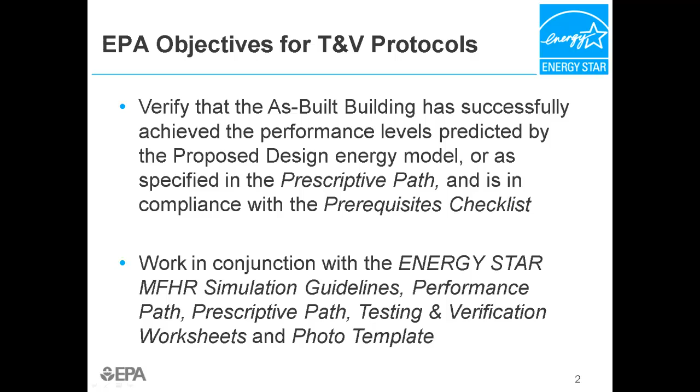One of the principal objectives in the multifamily high-rise program is that all buildings earning the ENERGY STAR meet some minimum prerequisites. A prerequisites checklist is provided to easily summarize and document these requirements. All building components must comply with the specifications contained within the prerequisites checklist. During an inspection, if a building component is determined to be in non-compliance with the checklist, corrective action must be taken to bring the building into compliance. Otherwise, the building will not be able to earn the ENERGY STAR. If following the prescriptive path, the prescriptive checklist includes all prerequisites and is used to document program compliance.

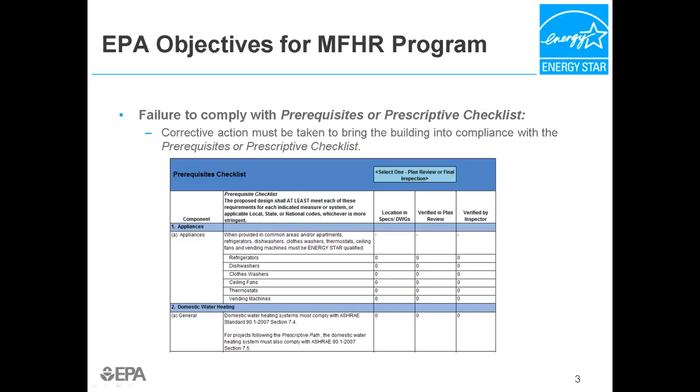Another objective of the program is to ensure that not only the design of the building meets ENERGY STAR requirements, but that the constructed building also meets those requirements. In the performance path, if an individual building component is found to be performing at a less energy efficient level than that which was included in the proposed design model, one of the following actions shall be taken. Otherwise, the building will be ineligible to earn the ENERGY STAR.

Option 1: Take corrective action to remedy the problem and bring the building component to the efficiency levels assumed in the proposed design model. Option 2: Allow the component to remain in its current condition, but the as-built energy model must be adjusted to accurately represent the condition. In any case, the as-built energy model must still demonstrate at least a 15% improvement over the baseline building.

In the prescriptive path, if an individual building component is found to be performing at a less energy efficient level than that which was required in the path, one of the following actions shall be taken. Option 1: Take corrective action to remedy the problem and bring the building component to the efficiency levels required by the prescriptive path. Option 2: Allow the component to remain in its current condition, but the building can no longer follow the prescriptive path. An as-built energy model must be created to accurately represent the completed building, and the as-built energy model must demonstrate at least a 15% improvement over the baseline building. If neither option is pursued, the building will not be able to earn the ENERGY STAR.

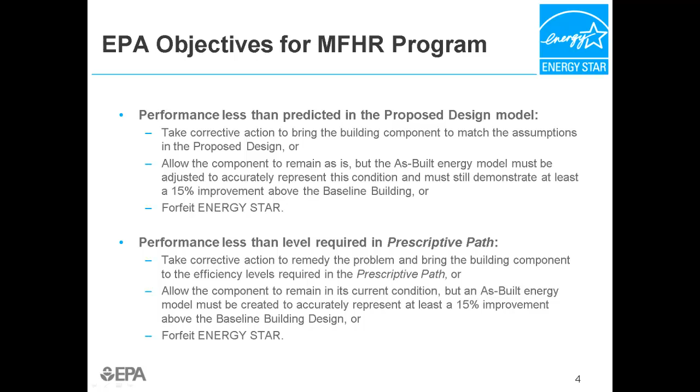Before we review the actual T&V protocols, we'd first like to describe the overall process that should be followed in order to successfully comply with them.

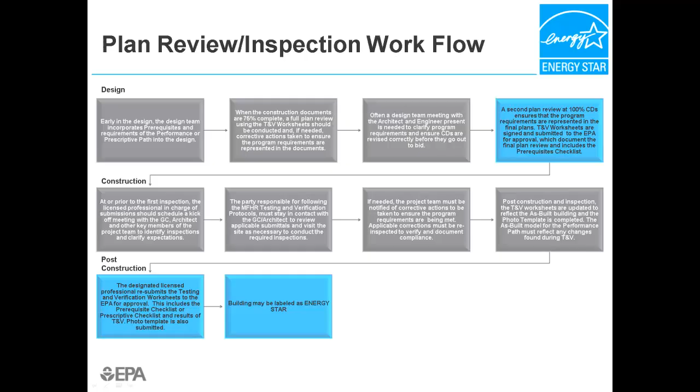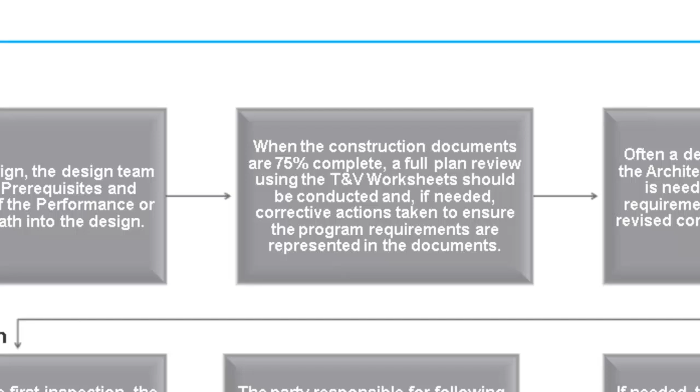Early on, the design team incorporates prerequisites and requirements of the performance or prescriptive path into the design. When the construction documents are 75% complete, a full plan review using the T&V worksheets should be conducted and, if needed, corrective action taken to ensure the program requirements are represented in the documents. Often, a design team meeting with the architect and engineer present is needed to clarify program requirements and ensure CDs are revised correctly before they go out to bid.

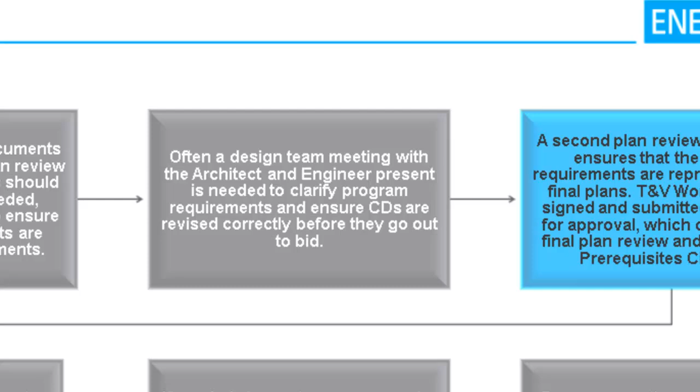A second plan review at 100% CDs ensures that the program requirements are represented in the final plans. This plan review is documented using the T&V Worksheets and must be signed by a registered architect or professional engineer and submitted to the EPA for approval.

Following the design stage but prior to construction, the licensed professional in charge of submissions should schedule a meeting with the general contractor, architect, and other key members of the project team to identify inspections and clarify expectations.

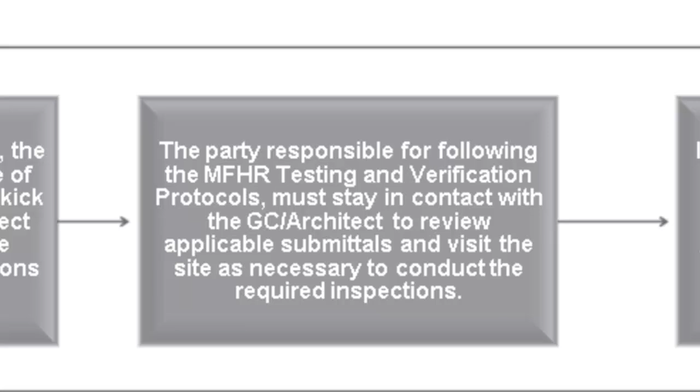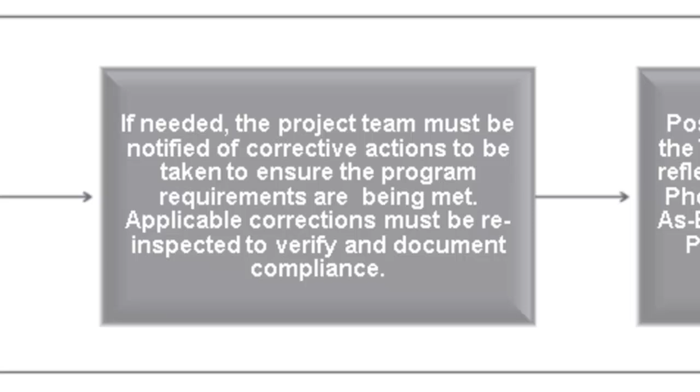The party responsible for conducting the testing and verification must stay in contact with the GC and architect to review applicable submittals and visit the site as necessary to conduct the required inspections. If needed, the project team must be notified of corrective actions to be taken to ensure that program requirements are met. Applicable corrections must be re-inspected to verify and document compliance.

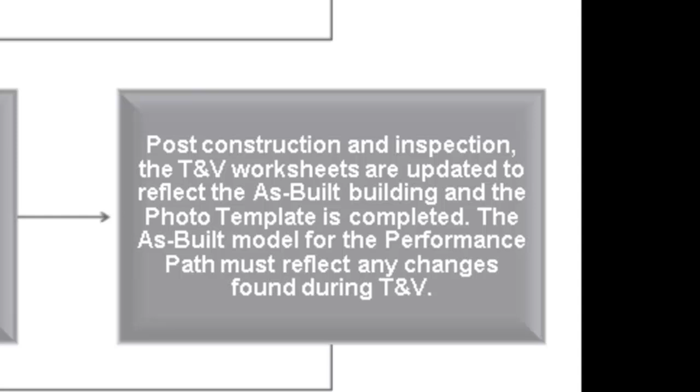Post-construction and inspection, the T&V worksheets should be updated to reflect the as-built building and complete the photo template. The as-built model for the performance path must reflect any changes found during T&V. The designated licensed professional should sign and resubmit the final testing and verification worksheets to the EPA for approval.

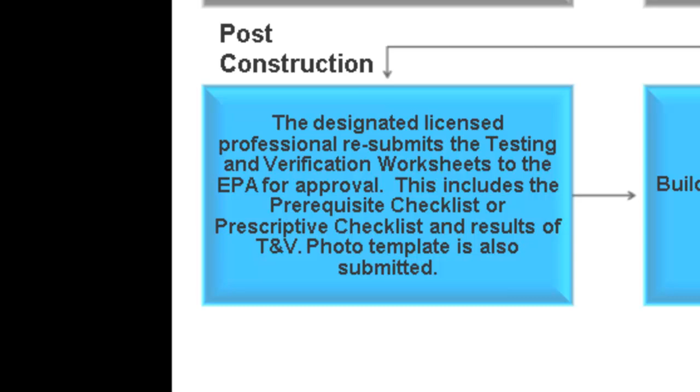This includes the prerequisites checklist or prescriptive checklist and results of testing and verification. The photo template is also submitted at this time. If approved by the EPA, the building may be labeled as ENERGY STAR.

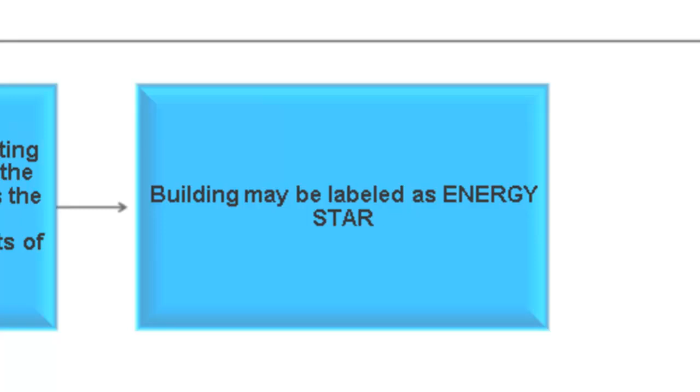Now let's review the protocols themselves.

The T&V protocols cover all building components, starting with appliances, central and in-unit domestic hot water systems, above-grade and below-grade walls, roofs, floors, windows, exterior doors, and vestibules.

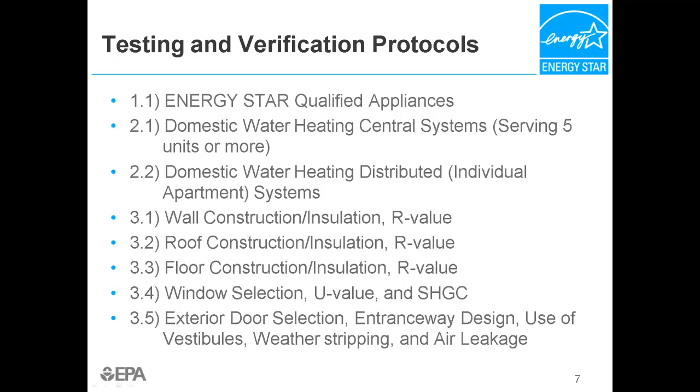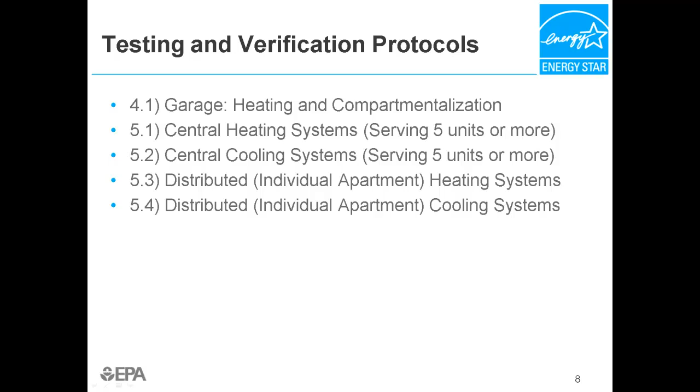Also included are garage heating and compartmentalization, central heating and cooling systems, and in-unit heating and cooling systems, as well as interior and exterior lighting and controls, emergency lighting, motors, envelope air sealing and total air leakage, common area and in-unit ventilation systems, and metering configuration.

We won't be reviewing these in detail in Part 1. Rather, we'll take a look at the basic structure of the protocols and how they will streamline the inspection process and help ensure that the project successfully achieves all program requirements.

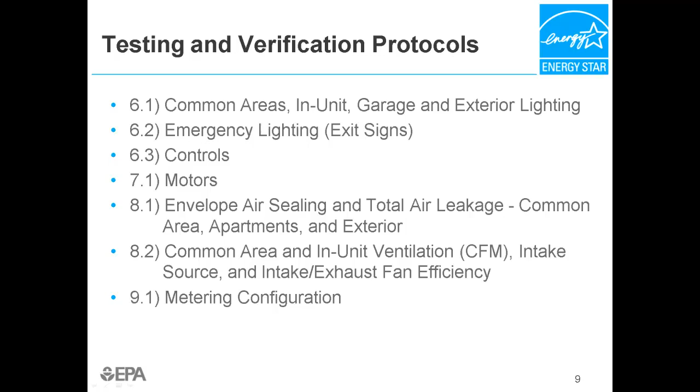Details on each protocol are provided in Parts 2 and 3 of this webinar series.

For each building component addressed in this document, a set of protocols has been defined using a standardized system and nomenclature. The standard elements of the protocol for each component are as follows.

The first element is the type of testing protocol. The type of inspection or test required is listed in this section based on a standardized set of options as follows. Visual inspection: if this is checked, it indicates that the conditions can be inspected via direct visual inspection of the existing condition and documented with detailed photographs.

If taking photographs, photos of faceplates, fixture type, insulation type and depth, etc., must be clear enough to read what is being checked. For example, reviewers should be able to read model numbers from the faceplate, GPM ratings from faucets, and the ruler showing insulation depth.

Also, the file name of each photo should clearly identify the building component and its location in the building. A Microsoft Word-based photo template is available to facilitate photo documentation for those protocols that require it. It must be submitted to the EPA at the end of the project.

However, once a licensed professional has submitted 3 photo templates to the EPA for buildings that have earned the ENERGY STAR, submission of the photo template is no longer required for that individual.

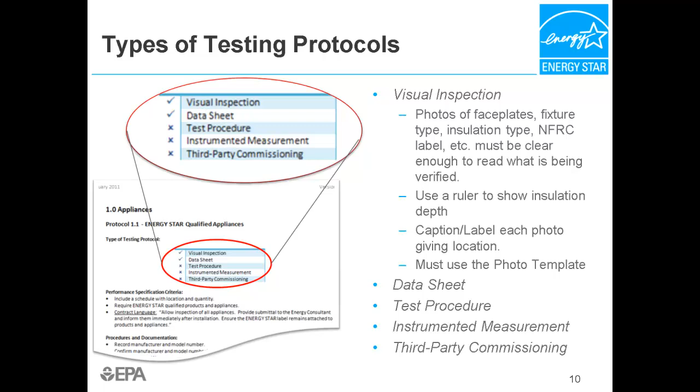The second element of the protocol is the performance specification criteria. This section lists the actions to be taken during the design, bidding, and construction phases of the project to ensure that the performance requirements of the building components are included in bid and contract documents so that subcontractors are properly informed of their responsibilities and expectations.

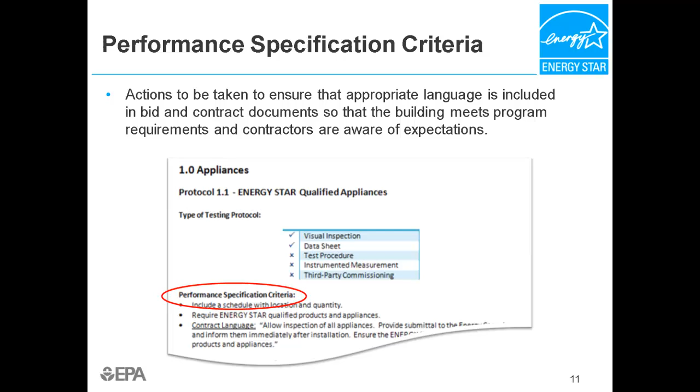All requirements listed in the performance path or prescriptive path must be incorporated into the construction documents. You should clearly identify who is responsible for proper installation and construction. In addition, contract language is suggested in this section that can be included in the construction documents to ensure that the GC is aware of his or her responsibilities in facilitating the inspection process.

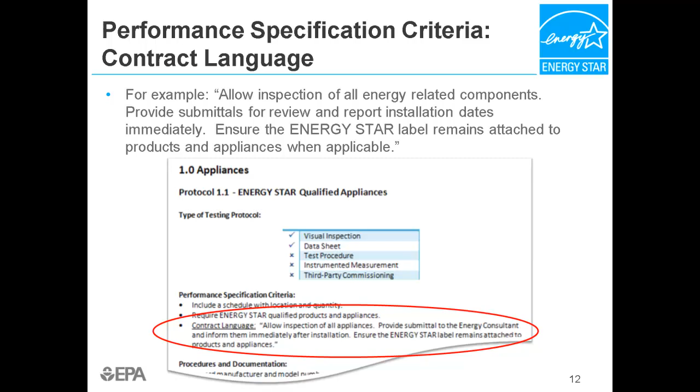The third element of each protocol is the procedures and documentation section. This section lists the steps to be followed to ensure that each building element is inspected at the appropriate time, and that the necessary data is collected and documented in the T&V worksheets and, if applicable, for use in the as-built energy model, or to prove that the requirements of the prescriptive path have been met.

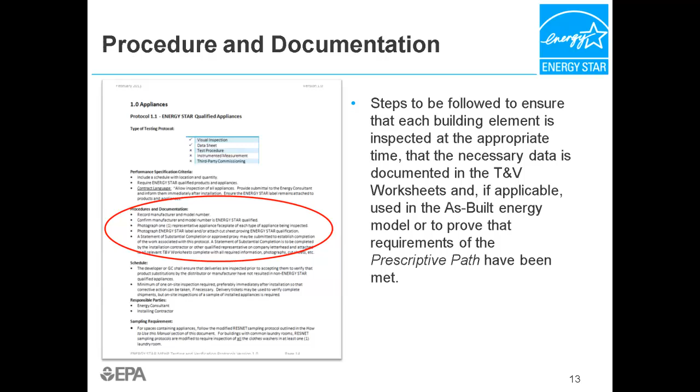The fourth common element of the protocols is the schedule section. Although exact timing of inspections may vary significantly from one building to another, this section identifies the point in construction when a particular inspection or test should take place. The party responsible for the testing and verification protocols must communicate frequently with the developer or GC to understand the construction schedule and be available for inspections when necessary without slowing down the construction process.

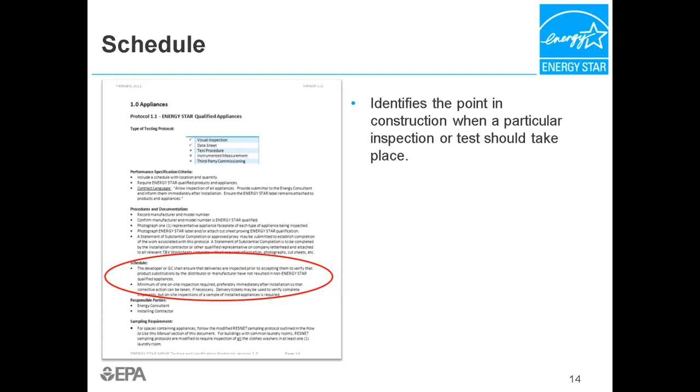The fifth element lists the responsible parties. This section identifies the potential parties responsible for a specific inspection or test and which other parties need to be available or coordinated with to effectively carry out the inspection.

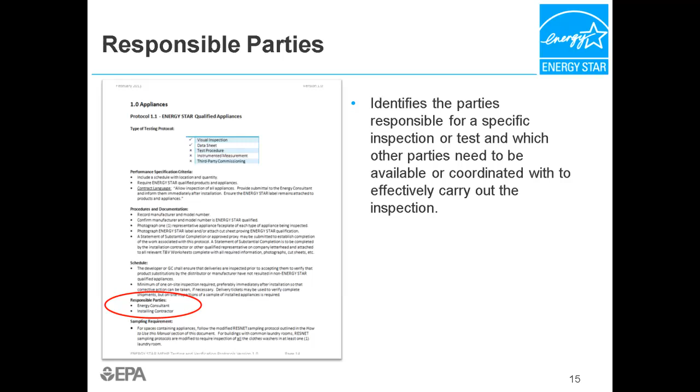The final element in each T&V protocol is a section on sampling requirements. For building components that are duplicated many times throughout the building, such as windows and light fixtures, or cover large areas or sections of the building, such as wall insulation, the sampling requirements section in each specific protocol identifies the minimum required area or sample to be inspected.

If the minimum sample is inspected with a 100% compliance rate, then the inspection process is complete. If a failure is detected within the sample set, corrective actions must be implemented and the sample retested in order to be compliant. In general, the testing and verification protocols that follow sampling follow RESNET sampling protocols, as opposed to requiring inspection of 100% of the installed components.

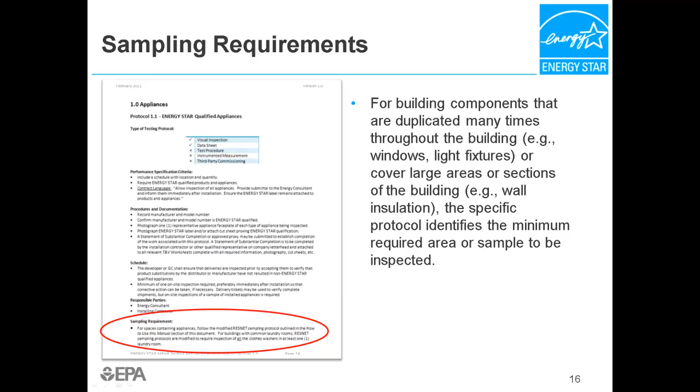For a full description of RESNET sampling protocols, please refer to RESNET's 2006 Mortgage Industry National Home Energy Rating Systems Standards, Chapter 6. However, the intent is captured in the following sections.

Section 603.7.1. A complete set of sampling controls shall be performed at a minimum ratio of 1 test or inspection out of 7 spaces or apartments within a given sample set, per the sampling rate requirements below. The sampling controls can be completed collectively on a single space or apartment, or distributed across several spaces or apartments within a given sample set, provided that the total number of individual tests and inspections meets or exceeds the minimum ratio set forth in 603.7.1.

For example, in a set of 7 apartments, all inspections for insulation, windows, and air leakage can be conducted on the same apartment and lead to compliance for all 7 apartments in the sample set. Alternatively, one apartment could be inspected for insulation, another for windows, and another for air leakage, and could also lead to compliance for all 7 apartments within the set.

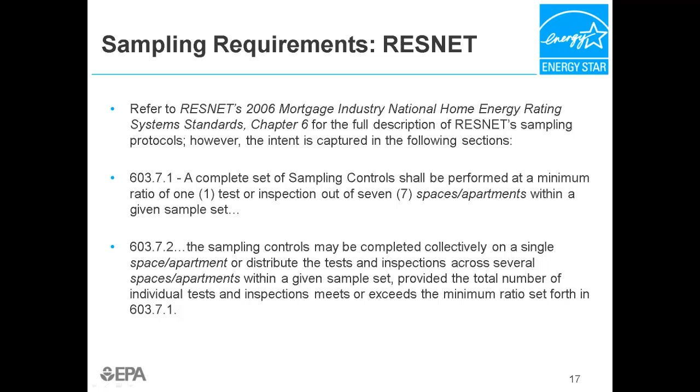603.7.3. To qualify for sampling in a metropolitan area, a builder shall first complete, without any incidents of failure, a complete set of sampling controls on at least 7 consecutive apartments in that metropolitan area.

For this initial phase of testing and inspection, the complete set of sampling controls shall be performed on each of the 7 apartments. For example, in a 100-unit building, each T&V protocol must be successfully met in 7 apartments before sampling can be used in the remaining 93. If a builder has completed the protocols in another building in the same metropolitan area, sampling can begin right away without the 7 consecutive apartments.

603.7.6. When an initial failure occurs, the failed item or items shall be tested or inspected in 2 additional spaces or apartments selected from the same sample set.

Testing and/or inspections for any items that may become inaccessible during the construction process, such as wall insulation, must be timed so additional testing and inspections can occur on other spaces and apartments in the sample set before they also become inaccessible for testing or inspection.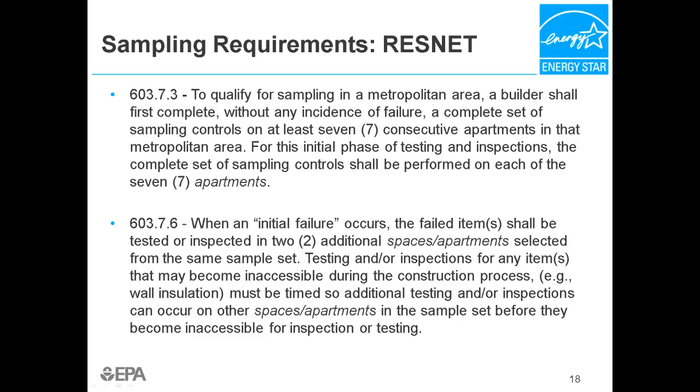603.7.7. When an additional failure occurs in one or more of the 2 additional spaces or apartments, the failed item or items shall be tested or inspected in the remaining 4 spaces or apartments selected for the same sample set.

603.7.8. Until the failure is corrected and identified in all failed spaces, none of the apartments or spaces shall be deemed to meet the threshold or labeling criteria.

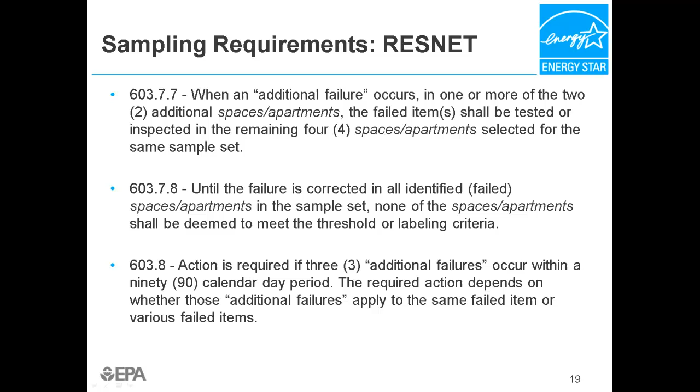603.8. Action is required if 3 additional failures occur within a 90 calendar day period. The required action depends on whether those additional failures apply to the same failed item or various failed items. Action could mean suspension of sampling and requiring testing and inspection of all units.

Let's review what's required for a statement of substantial completion. Not all of the testing and verification protocols need to be conducted by a third party. Some can be completed by the installation contractor themselves or another qualified representative.

When submitting the T&V worksheets, a signed statement of substantial completion, or approved proxy, may be attached to the relevant and fully completed worksheet. When submitting a signed statement of substantial completion, the project's licensed professional who is signing the EPA submittals is still responsible for performing the necessary due diligence to ensure that the statement of substantial completion is accurate and complete.

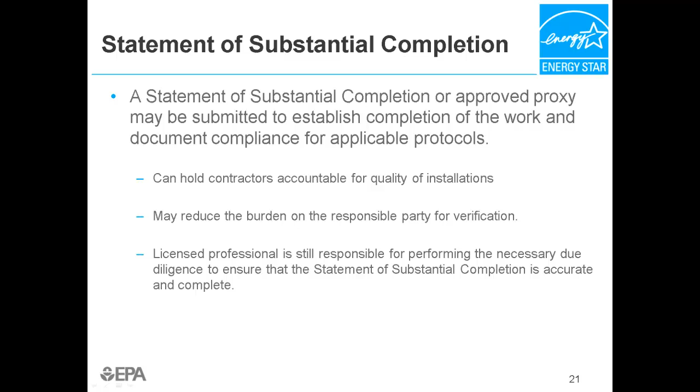The relevant T&V worksheet must still be completed with all required information, photographs, cut sheets, etc., to demonstrate compliance with the protocol. The actual statement of substantial completion should be on company letterhead and list the project name, address, contact information, and signature for the individual completing the statement, and state which protocols have been met through this approach.

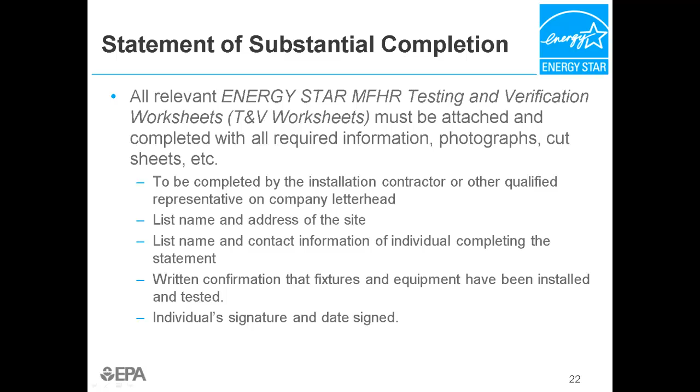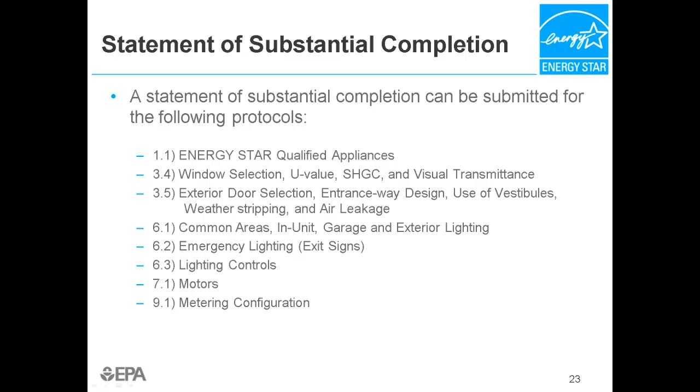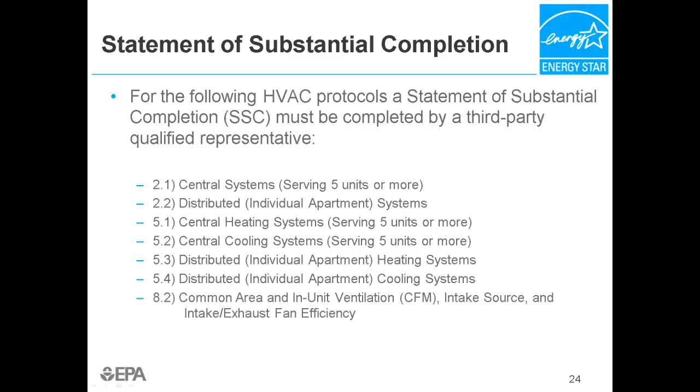Now that we have described the basic structure of each protocol, let's introduce you to the many standards referenced throughout the document.

The Air Conditioning Contractors Association, ACCA, publishes manuals J, S, and D. These manuals provide standardized procedures for completing sizing calculations for heating and cooling systems, manuals J and S, as well as duct system sizing and design, manual D.

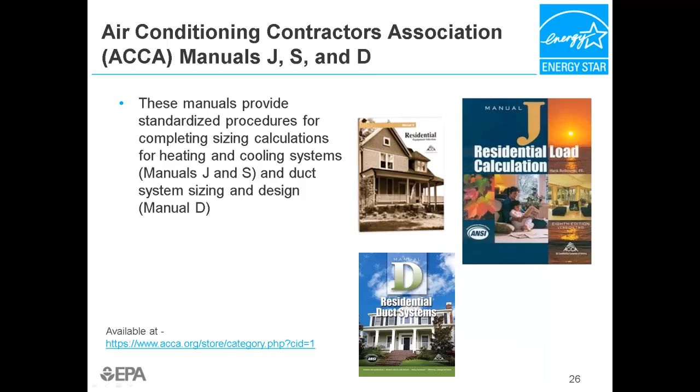The Air Conditioning, Heating, and Refrigeration Institute provides an online directory of certified ratings for heating and cooling equipment.

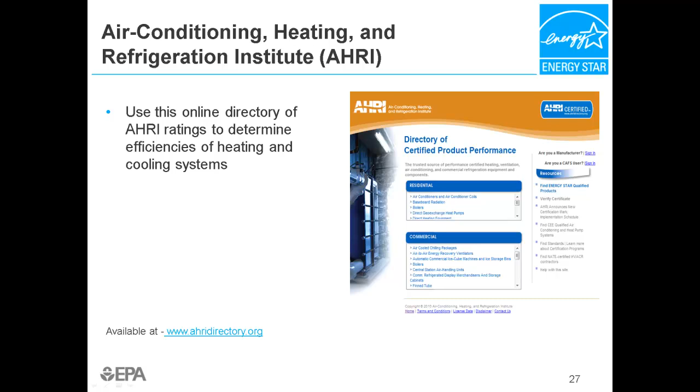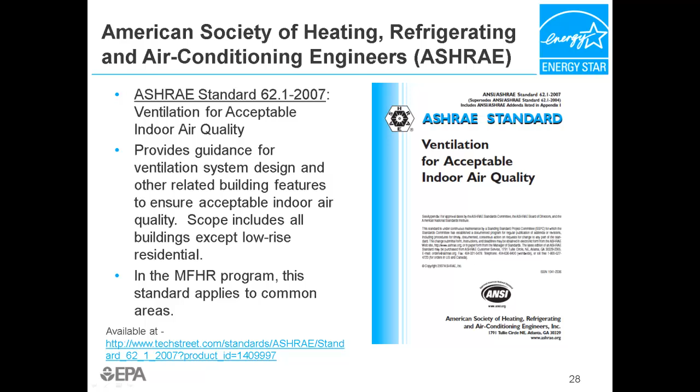The American Society of Heating, Refrigerating, and Air Conditioning Engineers, ASHRAE, developed a ventilation standard for acceptable indoor air quality that is referenced in the Multifamily High-Rise Program for Common Areas. ASHRAE also has a ventilation standard, 62.2/2007, that is referenced for the apartments of multifamily high-rise buildings.

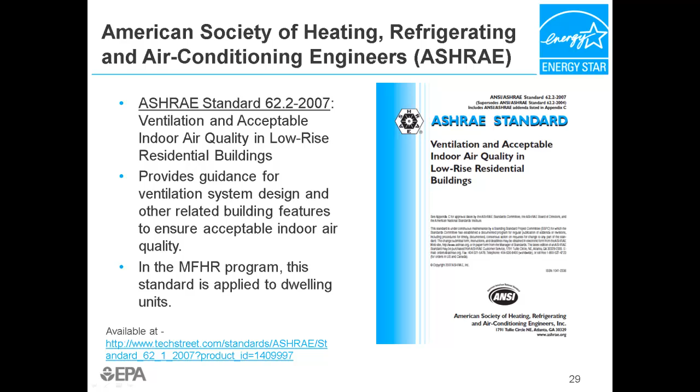ASHRAE Standard 90.1/2007 is an energy standard for buildings except low-rise residential buildings and describes the minimum requirements for the energy-efficient design of high-rise buildings. This standard is highly relevant to the performance path as it describes the efficiency of the building components of the baseline building.

ASHRAE Standard 189.1/2009 is the primary source document for the building envelope requirements and minimum equipment efficiencies for the prescriptive path.

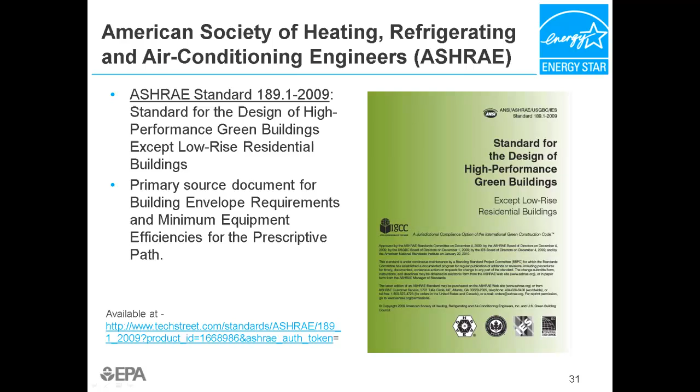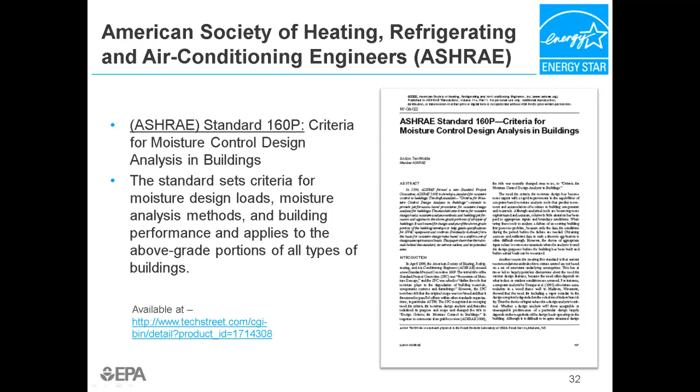ASHRAE Standard 160P is the standard that sets criteria for moisture design loads, moisture analysis methods, and building performance, and applies to above-grade portions of all types of buildings.

ASTM E779-10 is the test method that measures air leakage rates through a building envelope under controlled pressurization and depressurization. This is one standard used to determine whether measured infiltration of a random sample of apartments does not exceed 0.30 CFM50 per square foot of enclosure.

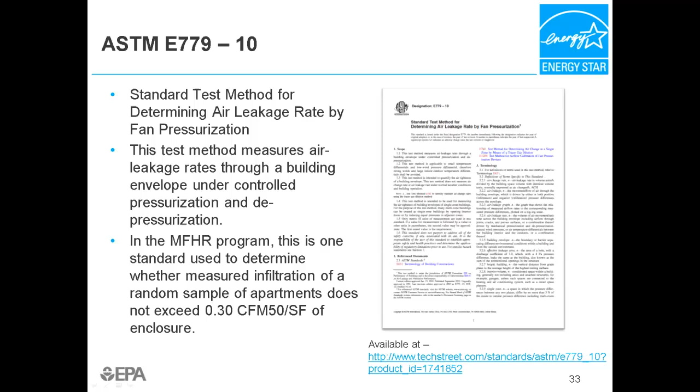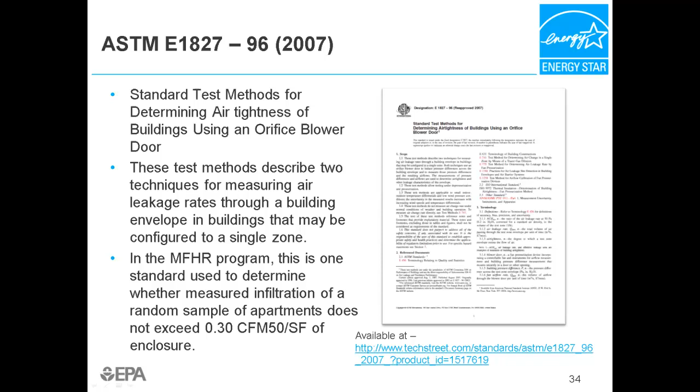ASTM E1827-96, 2007, includes test methods that describe two techniques for measuring air leakage rates through a building envelope in buildings that may be configured to a single zone. This is the other standard used to determine whether measured infiltration of a random sample of apartments does not exceed 0.30 CFM50 per square foot of enclosure.

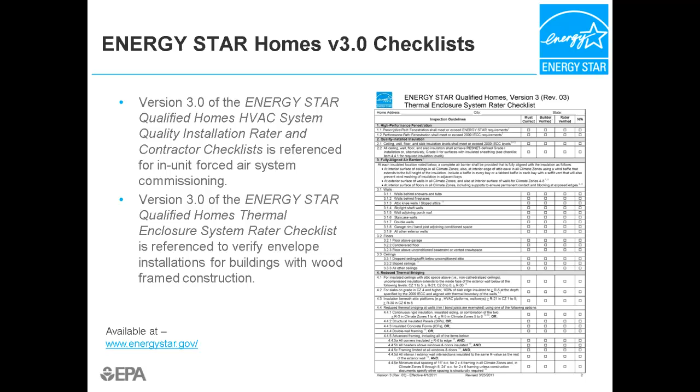Although not a requirement in the multifamily high-rise program, the ENERGY STAR qualified homes HVAC systems checklists can be used to document the installation of forced air systems in your building. Only two sections of the thermal enclosure checklist are required in the multifamily high-rise program, and only for wood-framed construction.

The Illuminating Engineering Society provides the recommended light levels and power densities that form the prerequisites in this program. The data needed is available in their handbook or in the performance or prescriptive path documents.

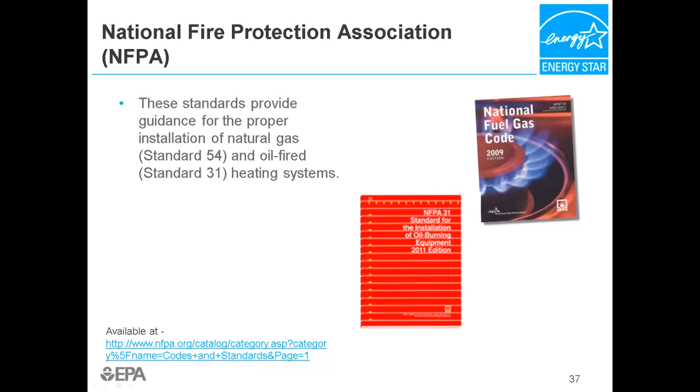In addition to the reference standards, there are pieces of equipment that are highly recommended in order to properly conduct the testing and verification protocols.

The static pressure probe is designed to measure static pressure only by excluding velocity pressure.

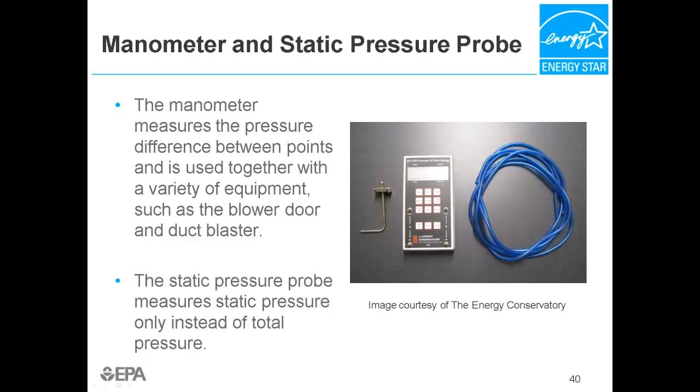The pressure pan is a duct leakage diagnostic tool which is used, along with the blower door and digital pressure gauge, to identify air leakage in duct systems. This technique involves placing a gasketed pressure pan over each register or grill with the air handler fan off and the blower door depressurizing the house to a standard reference pressure. A measurement of the pressure between the duct run and the room where the duct register or grill is located provides a quick and reliable indication of whether significant duct leaks exist in that section of the duct system.

The exhaust flow meter is designed to make a quick and accurate measurement of airflow through residential exhaust fans and is designed to measure flows down to 10 CFM. The measured pressure can be automatically converted to CFM of flow with many digital pressure gauges.

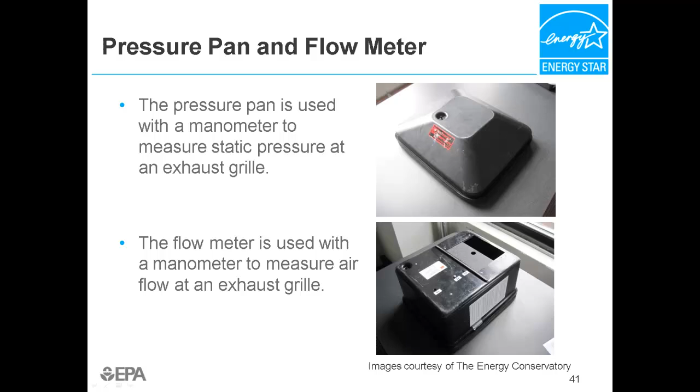The basic design of a balometer includes an airflow capture device, or hood, and a measurement device, or manometer. The flow capture device is typically a nylon fabric hood mounted over a collapsible frame that directs airflow over a sensing element inside the measurement device. The hood typically has one larger opening sized to fit a standard commercial register, with other hood sizes available. Most flow hoods can measure flow in both directions, supply or return, and have the capability to perform time averaging. Most flow hoods also have multiple flow ranges, usually attained by changing the readout device or by using a low flow screen.

Having a convenient source of chemical smoke can be extremely useful for diagnosing air leakage sites. The smoke puffer creates a reactive chemical to produce a dense, white, neutral buoyancy smoke that can be used to help identify air leaks during blower door testing.

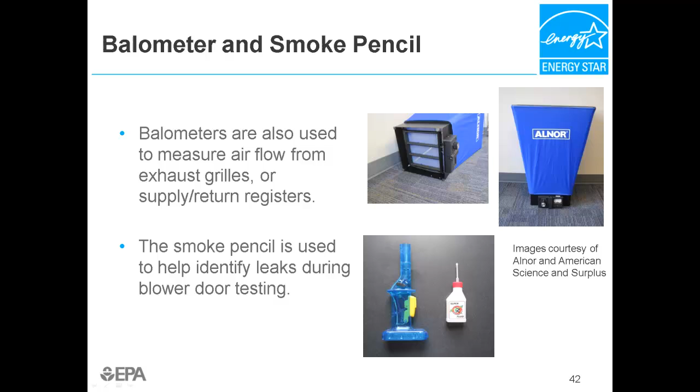The duct leakage tester is a calibrated airflow measurement system designed to test and document the airtightness of forced air duct systems. A duct leakage tester fan is connected directly to the duct system, typically at a central return or at the air handler cabinet. With the remaining registers and grills temporarily taped off, duct airtightness is measured either by pressurizing or depressurizing the duct system and precisely measuring the fan flow and duct pressure.

Duct airtightness measurements are used to diagnose and demonstrate leakage problems, estimate efficiency losses from duct leakage, and certify compliance with duct leakage standards. In the multifamily high-rise program, the standard is 6 or 8 CFM25 per 100 square feet of floor area, depending on the size of the apartment. Typical apartments would be allowed 50 to 90 CFM25 of total duct leakage.

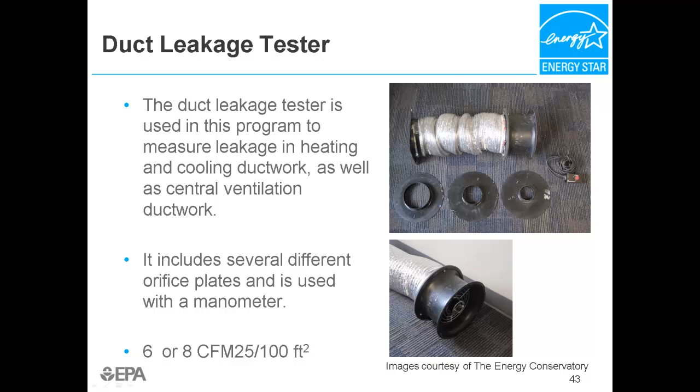The standard blower door system includes a single fan, digital pressure and flow gauge, adjustable aluminum frame and a nylon panel, and, if supported, a software program that can be used to download test results to your computer. Typical blower door fans provide quick and accurate flow measurements from 300 to 6300 CFM. To measure higher rates, multi-fan blower door systems are also available.

In the multifamily high-rise program, the maximum envelope leakage is 0.3 CFM50 per square foot of enclosure. Typical apartments would be allowed 800 to 1200 CFM50 of leakage, depending on size.

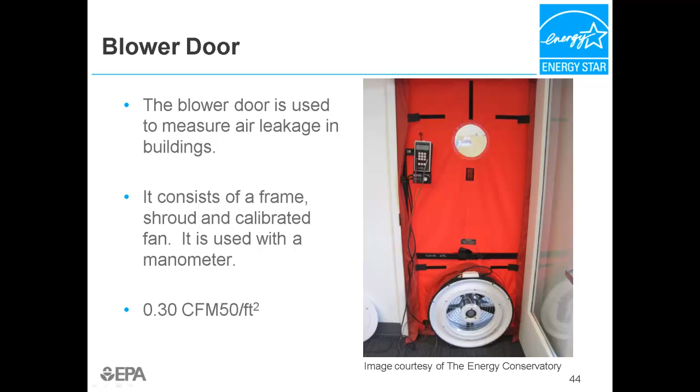Flow plates are designed to provide a simple and accurate measurement of airflow through residential air handlers. The airflow rate through residential air handlers is an important variable in estimating and optimizing the performance of heat pumps and air conditioners. A flow plate temporarily replaces the filter in a typical air handler system during the airflow measurement procedure. If the filter location is directly adjacent to the air handler, the flow plate will measure the total air handler flow. If the filter is located remotely at a single central return, the flow plate will measure the airflow through the central return.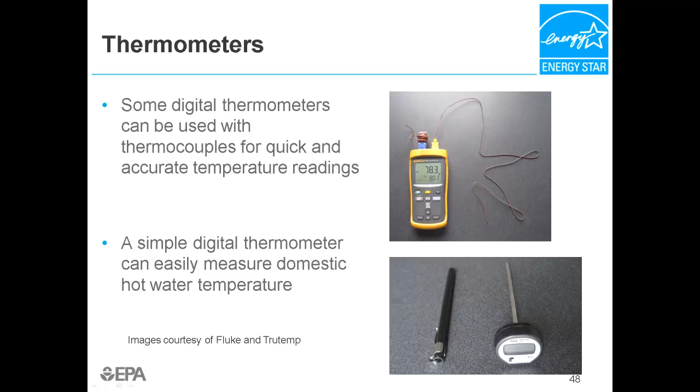A low-E detector is used to check for the presence and location of low-E coating in insulated glazing. Use it to confirm the invisible low-E coating is properly installed in your double-pane insulated glass units.

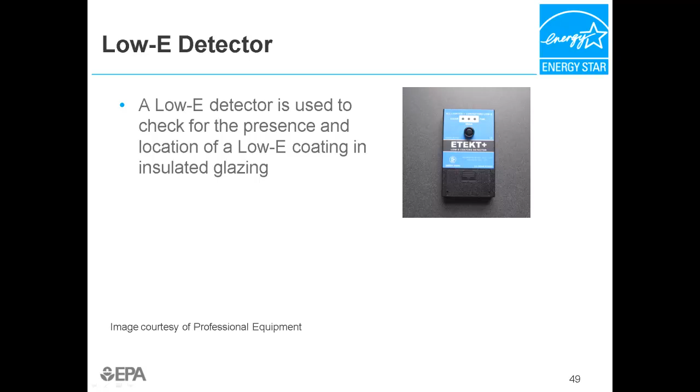The final appendix in the Testing and Verification Protocols provides additional standards for buildings utilizing flexible ducts in their air distribution systems.

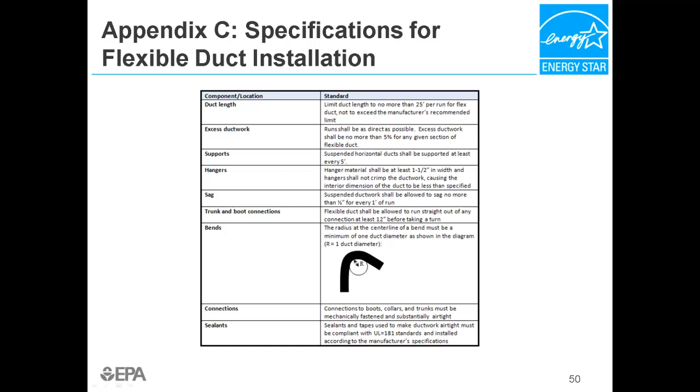We've mentioned two supporting files that have been developed to help document the Testing and Verification Protocols: the photo template and the Testing and Verification Worksheets. The Word-based photo template was designed so that pictures used to provide photo documentation required by the Testing and Verification Protocols could be quickly and easily formatted and consistently reported. This photo documentation must be submitted to the EPA or its designated agent at the end of construction. The photo template only needs to be submitted for the developer's first 3 buildings that participate in the program. Also, if the licensed professional validating documents has successfully submitted at least 3 photo templates, the requirement is waived.

The other supporting file is the T&V Worksheets. Rather than create PDF-based checklists, these mandatory Excel-based worksheets have been developed that document the results of plan reviews, inspections, verification, and performance testing. The worksheets follow each protocol, but are organized for the convenience of the site inspector and provide a central file to store building information relevant to all members of the design team, from the architect and energy modeler to the project manager and site inspector. A separate webinar is available to explain how to use these worksheets. These worksheets are submitted to the EPA both before and after construction.

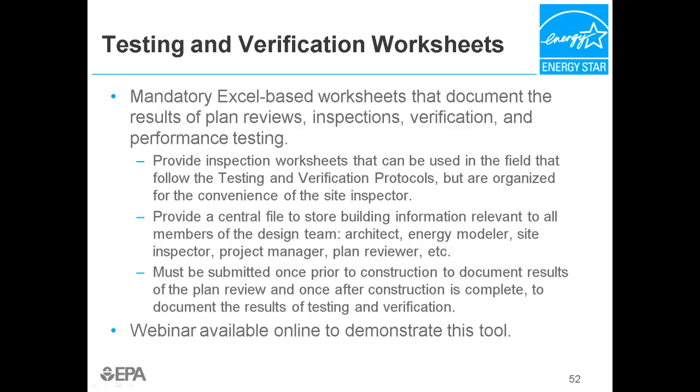Although Part 1 of this webinar was a general overview of the testing and verification protocols and supporting tools, to improve the chances of a multifamily high-rise building successfully earning the ENERGY STAR, the following tips are offered to program participants. Number 1: as early in the design phase of the project as possible, review the prerequisites checklist.

Incorporate the requirements listed in the prerequisites checklist into the design documents and review any unique features of the building that will require special attention in design or construction to ensure that the building meets all requirements of the prescriptive path or meets the performance target once the energy simulations are complete. The performance requirements are listed in the performance path and prescriptive path documents on the website, as well as in the checklists within the T&V worksheets.

Number 2: near the end of the design phase, ensure that all energy-related details are included in the bid documents so that subcontractors are fully informed of the scope of work they are bidding on.

Number 3: use pre-bid meetings to help answer questions and clarify the subcontractor's roles in the successful construction of a high-performance building.

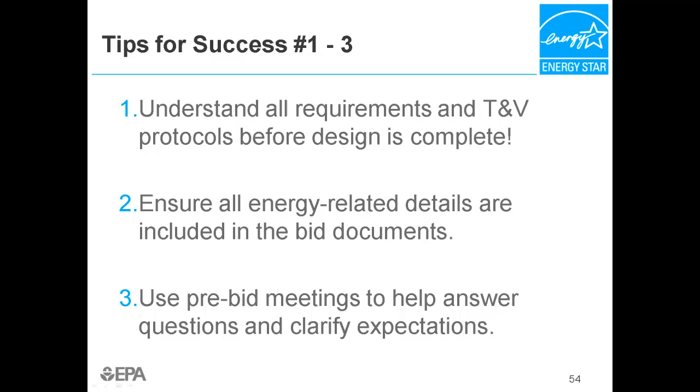Number 4: the developer should specify details to be inspected and conformance criteria in the construction documents so it's clear who is responsible for corrective actions to remedy any inspection failures.

Number 5: use a pre-construction meeting with the developer, GC, and all trades contractors to cover the details to be inspected. Close attention should be paid to those details that are most commonly overlooked in standard construction, including air sealing details, duct sealing details, installation specifications, etc. All parties should be informed at this time of their specific responsibilities for documentation and submittals to the EPA.

Number 6: schedule inspections to occur as soon as possible after construction reaches the point where an inspection of a specific feature is possible. This will improve the likelihood that corrective action can be taken in a cost-effective and timely manner. Inspecting a sample of a specific feature, such as wall insulation in an apartment, near the beginning of the installation of that feature will allow for corrections to be made on installations going forward, rather than causing the contractor to correct improper installations after the fact.

Timing is critical for many of the inspections listed in the protocols. The construction process may not always progress in a manner that allows for multiple building elements to be inspected in a single visit. Maintain close contact with the GC and stay up to date on anticipated construction schedules so that inspection staff can be available at the time they are needed on site.